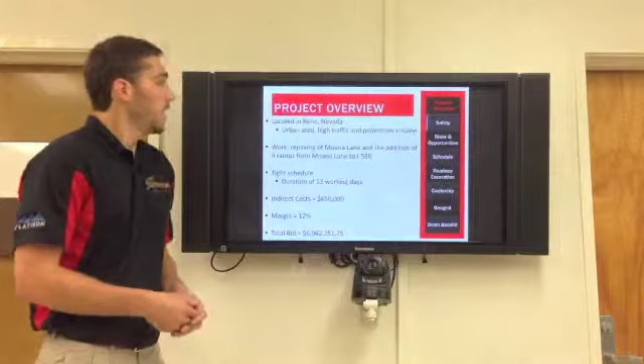To give you a summary of this year's actual project, it was the addition of 4 new on and off ramps from Moana Lane to the I-580. The schedule for this project will be 53 working days, which is very tight, because the city wants the on and off ramps completed by Black Friday.

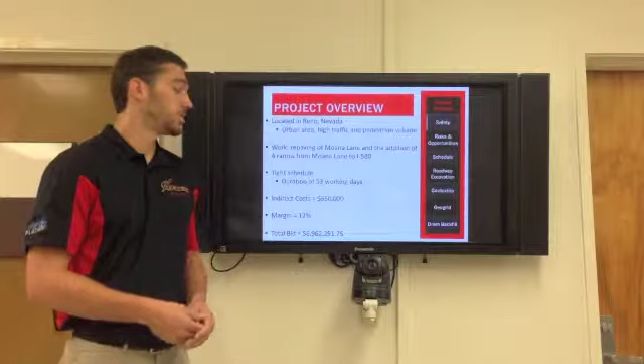The indirect costs for this project are $650,000 with a margin of 12%. This will come out to a total bid of $6.9 million. Now I'd like to pass it off to Fabian, who will tell us a little bit about the scheduling.

The schedule for this project is really condensed. Like it was mentioned previously, we have to build it within 53 working days, which is pretty much 3 months. The reason for this is that the owner wanted us to meet 2 different milestones, and if we didn't meet those, we had to pay liquidated damages. The highest one went up to $20,000.

This really tight schedule created pretty much 100% critical activities within it, and besides being really tight, we also had to take into account traffic control restrictions from the state of Nevada, where we had to maintain traffic at all times. We were only allowed to do night shifts, but maintain traffic at all times.

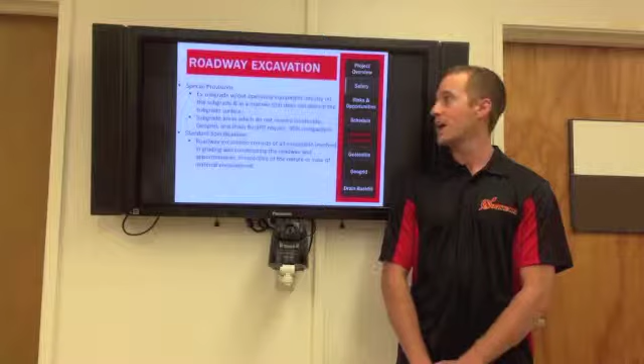For the roadway excavation item on this project, there are some requirements found in the special provisions, including excavating to subgrade without disturbing the subgrade surface, and we must compact the subgrade to 90% in all locations which do not receive geogrid, geotextile, and drain backfill.

We broke this item into 6 separate operations, including layout using a GPS survey crew to set the locations of our saw cut. When we go in, we saw cut to get a clean line to the new pavement. We use a Cat 350 excavator with a breaker attachment to demolish the existing AC, which is spoiled directly behind it, with a Cat 980 loader loading into end dumps and hauling to disposal.

Next, we will rough grade using the Cat 350 excavator and a 140 blade to fine grade. In the locations which require the 90% compaction, which only accounts for 21% of the total item, we use a 10-ton smooth drum roller. Finally, the excess base and native material will be loaded and hauled to disposal.

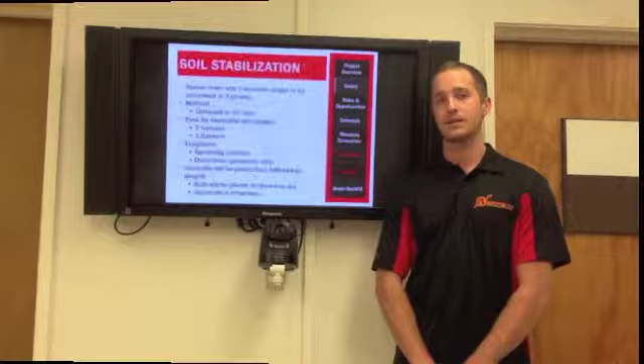Thank you, Alex. So as you can see here, we're going to be going over the soil stabilization for this project. We ended up using 2 different types of soil stabilization, one for horizontal and one for vertical. You can use these separately or together, and based on our soil test, we decided to use both. It's stopping the vertical and the horizontal shear of the soil, the geotextile, and the geogrid.

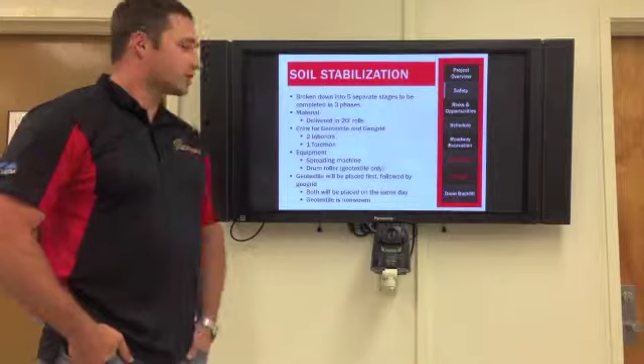They're both basically applied in the same manner, using 20-foot wide sections with a spreading machine, as well as some laborers to hold down the ends, sew them together, and stake them at the ends to tighten them, followed by the drum roller to flatten out any inconsistencies, creases, anything like that. They're done immediately following the structure section because we don't want to tear or damage any of the material.

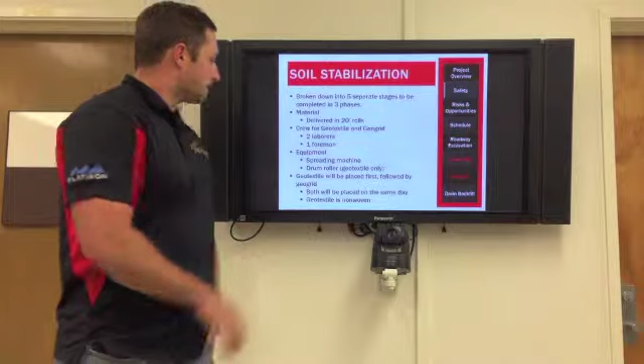So the only key note on the geotextile and the geogrid is just that the geotextile is specifically mentioned not to be woven material, based on the amount of traffic that will be going on top of it while we do our drain backfill and ag base.

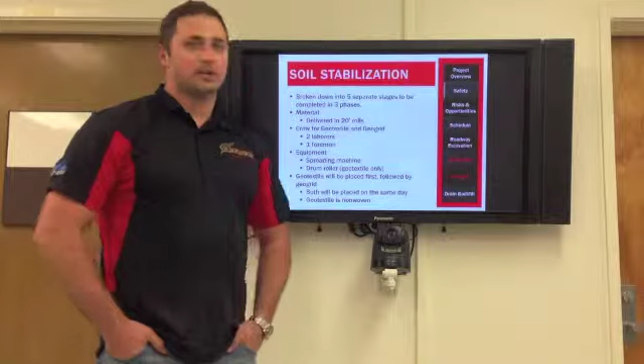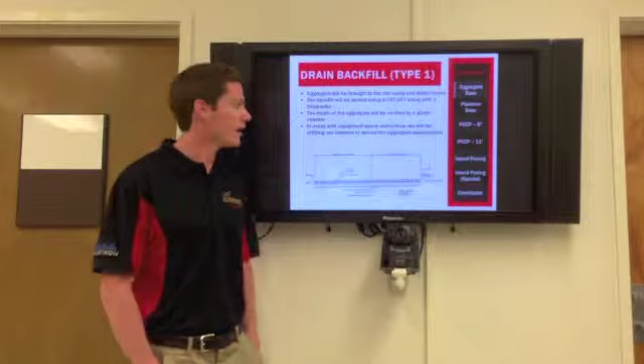So I'll turn that over to Matt Beluski to do the drain backfill and the ag base. Thanks, John. After soil stabilization, drain backfill and aggregate base must be laid. Aggregate will be brought on using end dump trucks. The backfill will be spread using a Cat 140 along with a skip loader. Depth of aggregate must be checked by a grade checker. Laborers will be used to spread the aggregate in areas where there are space restrictions.

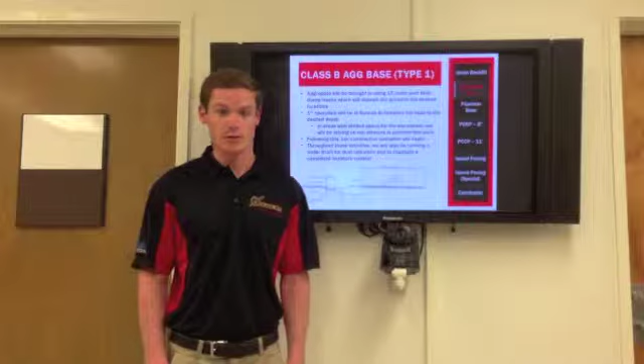The aggregate base will be brought in using 15 cubic yard belly dump trucks. The first operation will be to spread and compact the base. Throughout these activities, we are required to run a water truck to manage dust and maintain aggregate moisture content. Now I'll pass it off to John.

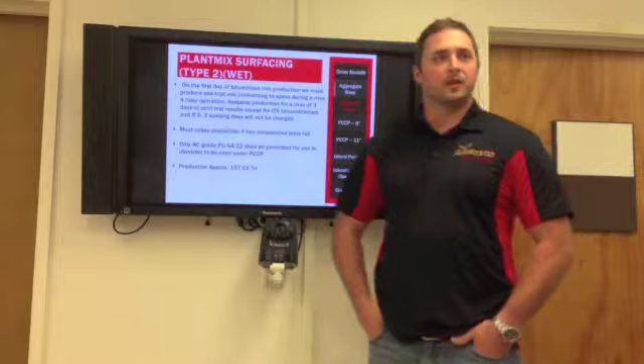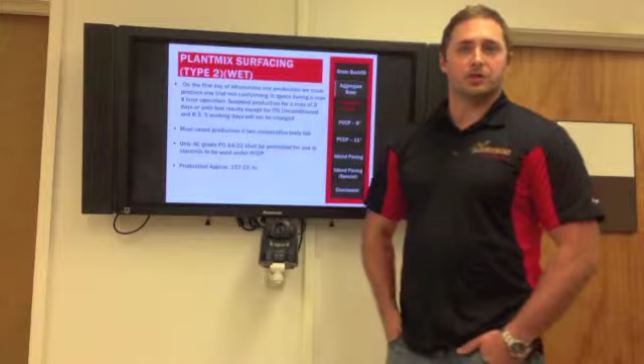All right, thank you, Matt. So as you can see here, the next topic we'll be going into is the plant mix surfacing. Basically, that's just our hot mix asphalt on site, and it's going to be going on top of the ag base. The reason for this is because it's a good binder for the top of the ag base to hold everything together and to create a suitable surface for the PCCP paving that we'll be doing next with Mona.

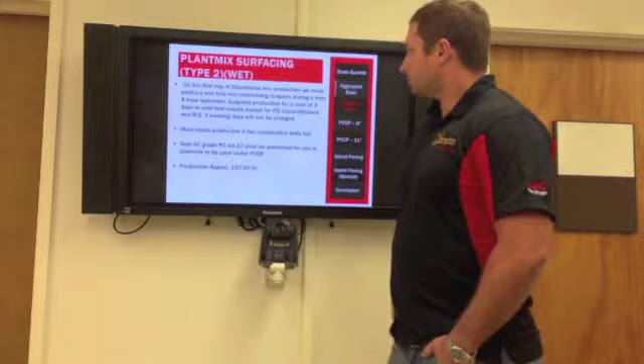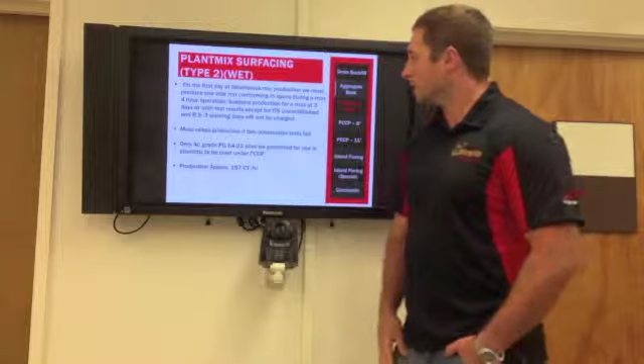As you can see here, there's a couple small keynotes we had to do with this. First, on the first day of the mix, we must produce one trial mix conforming to specs to deliver to the owner. If we fail that, we have to wait 3 days before we go again. Also, we must cease production if we have 2 tests fail. It's very key to have the proper mix, especially in this type of climate.

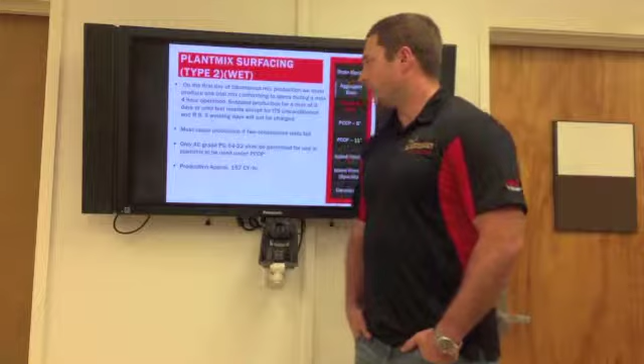The other keynote is the PG64-22, which is a significant property because it's the only type of oil we're allowed to use for our HMA in the area of Reno, Nevada, because of the temperature changes. Based on that, we needed to do it excessively fast and do it right after the ag base.

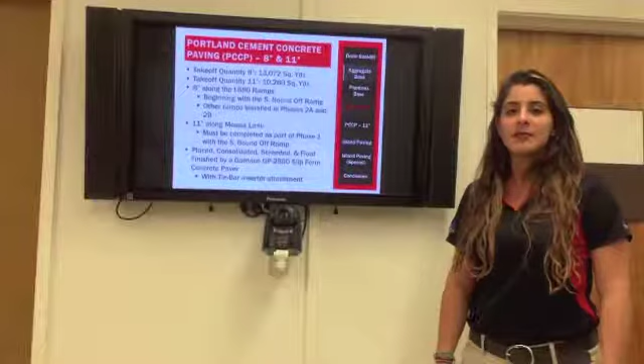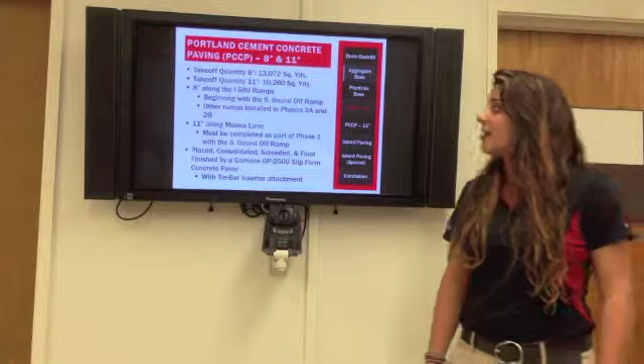I'll turn it over now to Mona, who will do the PCCP paving. For the Portland cement concrete pavement on this job, we had 2 different depths, an 8-inch and 11-inch, totaling about 23,000 square yards. The 8-inch was along the I-580 ramps, while the 11-inch was along Moana Lane.

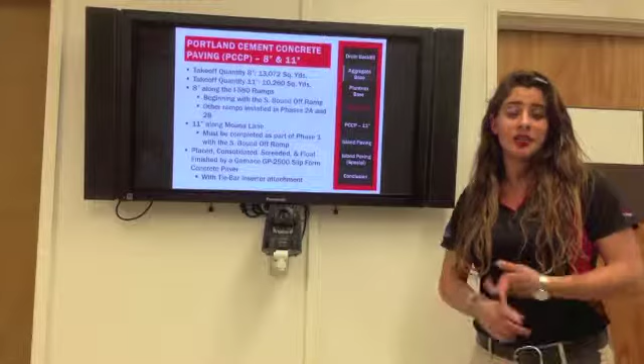The southbound off-ramp, along with the part along Moana Lane, needed to be completed during Phase 1 in order to open them up to traffic, while the remaining ramps were going to be installed during Phase 2.

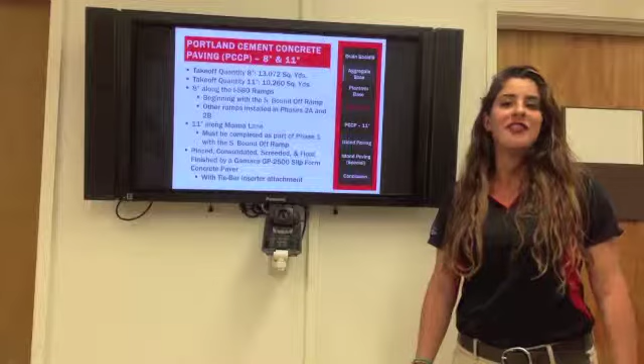We utilized a Gomaco GP 2500 slip-form paver to place, consolidate, screed, and float finish the concrete in order to minimize our labor costs and save money overall.

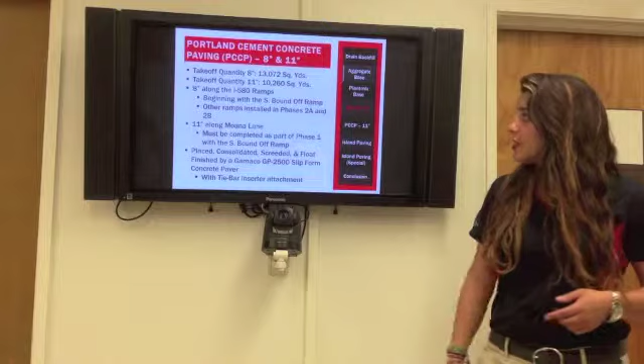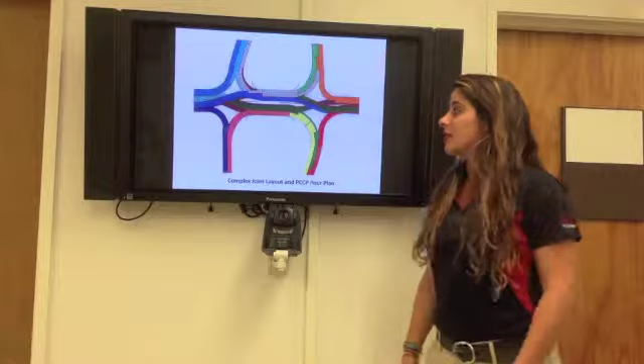On the next slide, you can see our pour plan, which included 12 different pours that occurred over the 2 phases. Some steps we took to ensure quality control and assurance were maintaining that the air content was up to spec, that the slump was less than 3 inches, which was a requirement for the paver, that the water to cement ratio, the compressive strength, and the placement and coverage for the dowels and tiebacks were per spec.

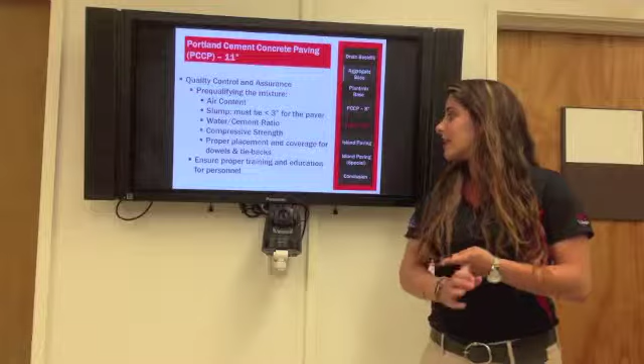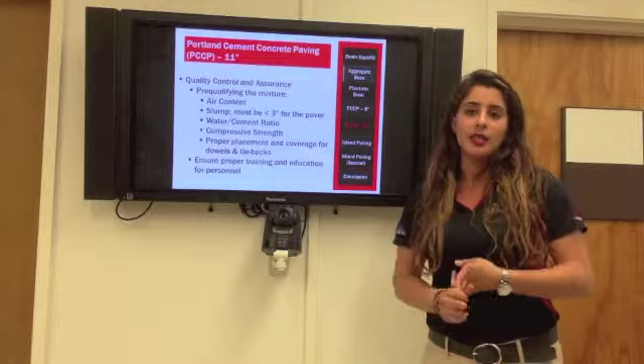We're also going to ensure that all of our personnel have proper training and education on both the machine and the process of the slip-form paver to ensure that it is up to par. Next, I'm going to pass it over to John for the island paving.

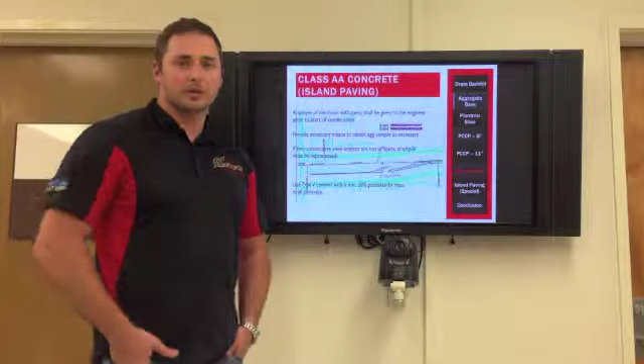Thank you, Mona. So as you can see here, we're going into the Class AA concrete, which is called island paving. As you can tell by the title, it includes all the islands we did throughout the project, and they're all different medians. Because of the type and nature of this project being a diverging diamond, there were multiple islands incorporated in this project to help with traffic flow.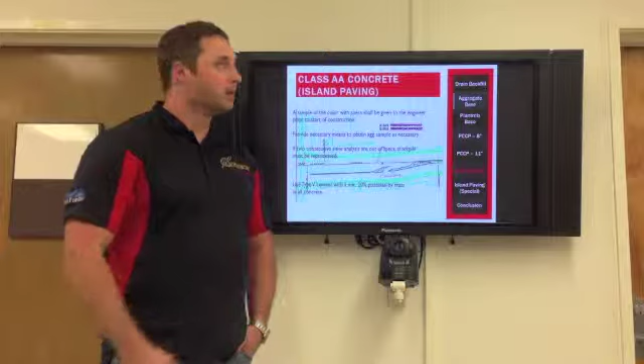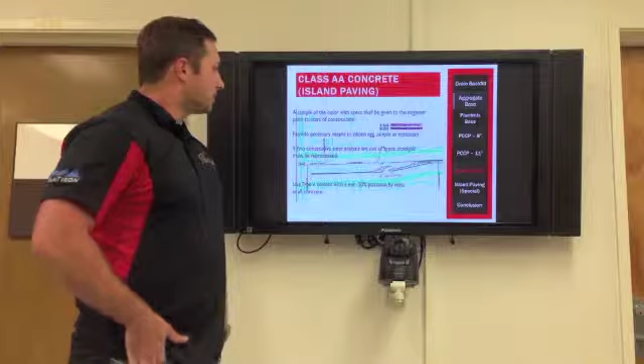The only key parts about all these islands were, one, that they were a specific color that had to be signed off on by the owner as well as the city, and two, the type of concrete with the pozzolan percentage, as well as the aggregate, all had to be sampled and tested by the engineer and approved by the county. As you can see in the next 2 slides, these are just the areas where we had the regular island paving.

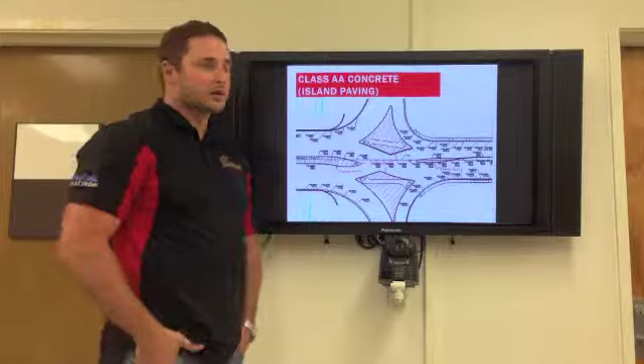Through here and here, they went through the center of the project for about a mile, and they were separated by some of the other paving that we had on hand.

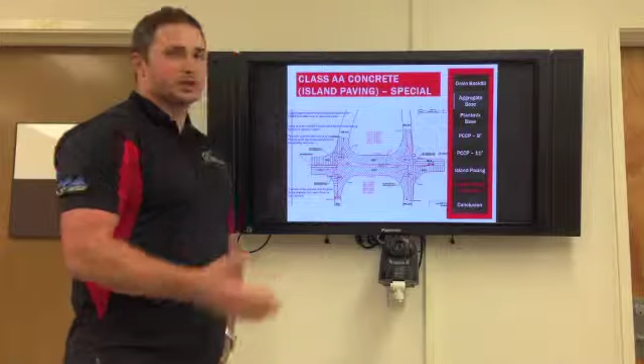As you can see here, this is where it turns into the special island paving. This is where you go past just the color and the type of concrete - you actually go into stamping. All 4 of these islands had to be stamped with a specific canyon stone random interlocking pattern, and that actually had to be submitted as well and approved by the engineer as well as the owner.

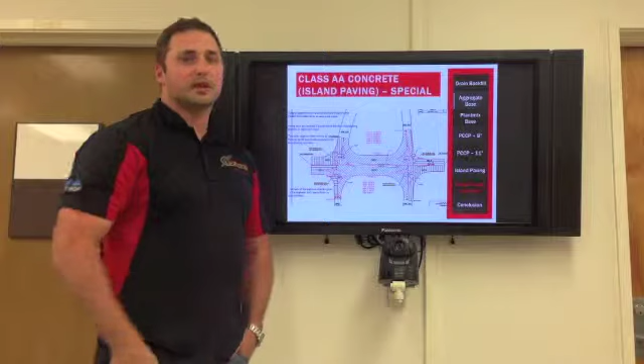Other than that, they were really as basic as an island as you can get, besides the components that actually went into the mix design for these. So now I will pass you off to Jordan to conclude our project.

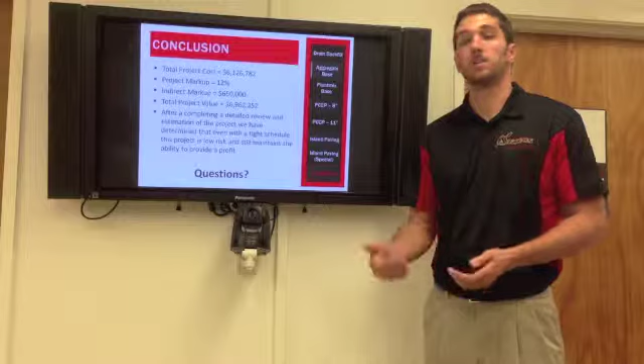In conclusion, our total project cost came out to $6.1 million. With the addition of our indirect costs and our margin, the total bid came out to $6.9 million. After analyzing all the risks associated with this project, we've determined that it is going to be very profitable, and we plan on doing a very successful job on it.

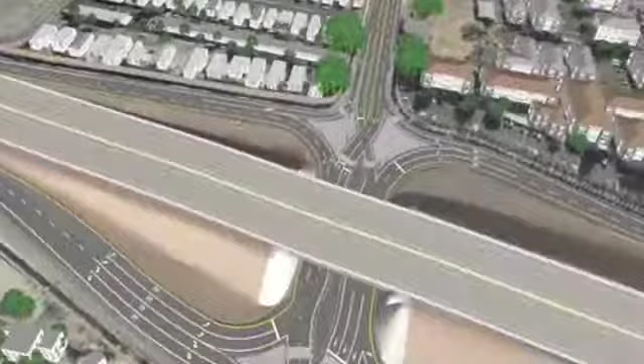Now I'd like to finish by showing you a 3D rendering of what the project will look like upon completion. We'll start by heading eastbound on Moana, where you will be directed to cross diagonally beneath the interstate.

Here you will have an opportunity to make a free left-hand turn to northbound US 395. You can see this is unsignalized, unlike the current configuration, where you have to stop on both sides of the interchange and wait for a left-hand turn.

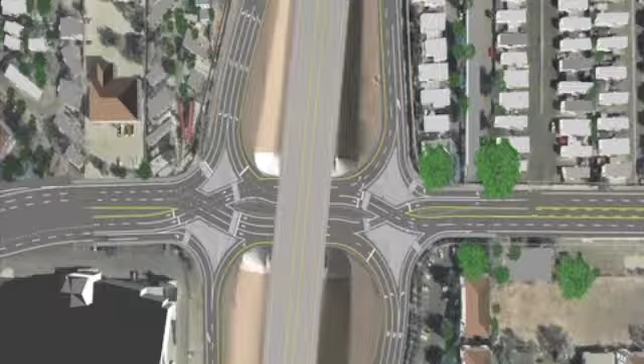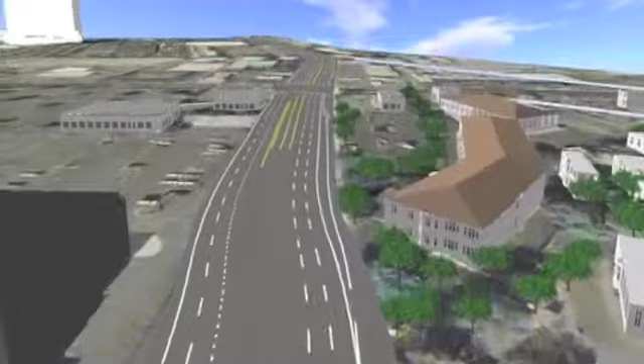Next, let's demonstrate heading northbound on US 395 to head westbound on Moana Lane. First, you'll stop at a traffic signal. Then you will traverse beneath the interstate on the left-hand side of the road. At the crossover, you will be directed diagonally back onto the right-hand side of the road. The diverging diamond interchange is a very unique design that has been successfully implemented across the country with tremendous success.